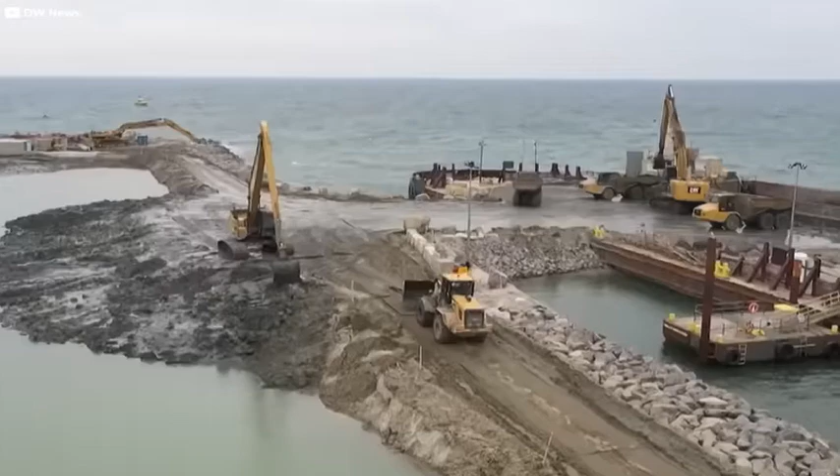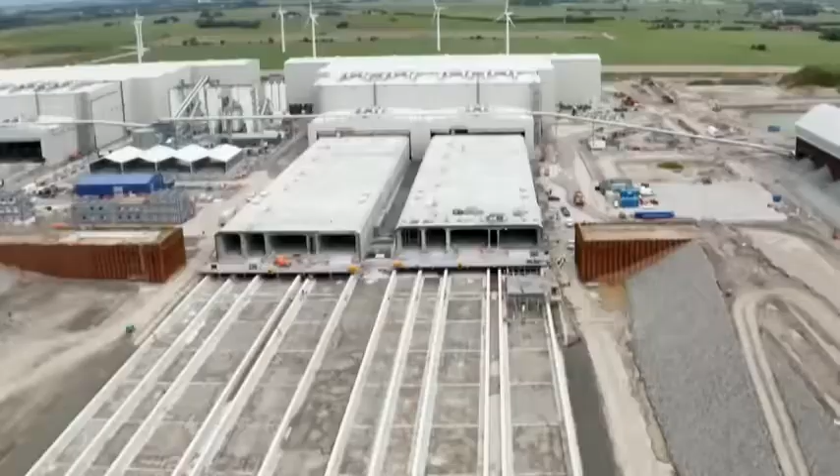The calm surface of the Baltic Sea conceals a quiet yet transformative effort by Germany and Denmark. These two nations are steadily reshaping Europe's future, one enormous scoop of sand at a time. In southern Denmark, a massive project is taking shape to connect the country with Germany. What appears to be a discreet dredging operation is, in fact, part of one of Europe's most ambitious infrastructure ventures, larger than it first appears. Backed by billions of euros, this plan could forever alter how countries link and interact. But why is Germany digging so extensively beneath the sea, and why is it attracting so little attention?

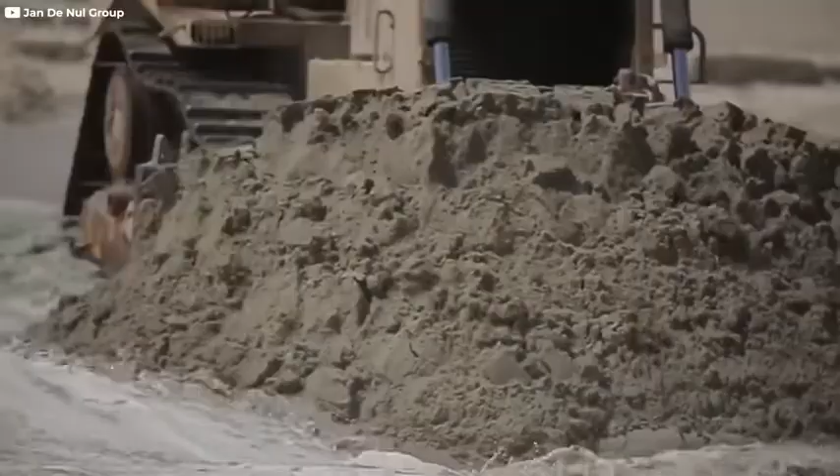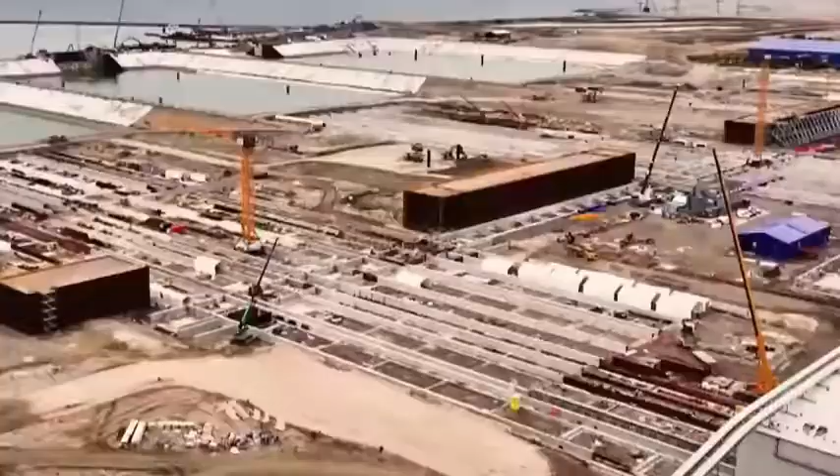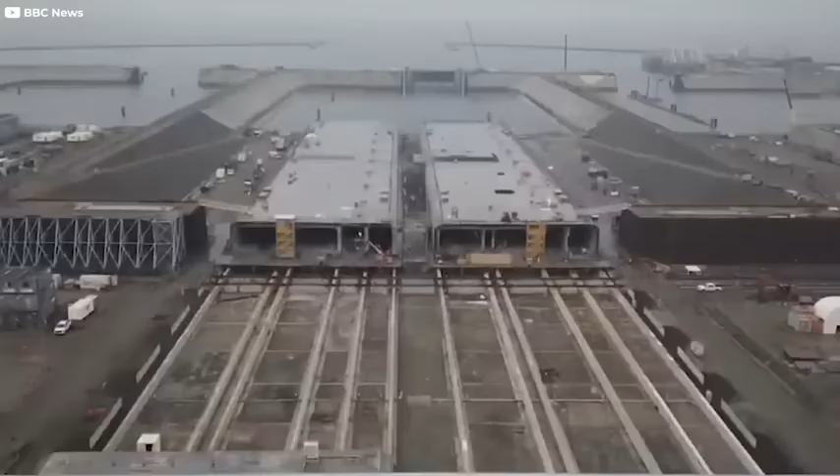Deep under the Baltic, a monumental dredging operation is quietly progressing. This project is so grand in scale that it's being compared to the Channel Tunnel. At the heart of it lies the Fehmarn Belt Fixed Link, a 17.6-kilometer submerged tunnel that will connect Rødbyhavn in Denmark to Puttgarden in Germany. When finished, it will become the longest combined road and rail immersed tunnel in the world. It's an engineering triumph that's quietly setting new benchmarks for infrastructure, even as global headlines focus elsewhere. More than just a connection between two countries, this tunnel is poised to reshape transportation and trade across Europe.

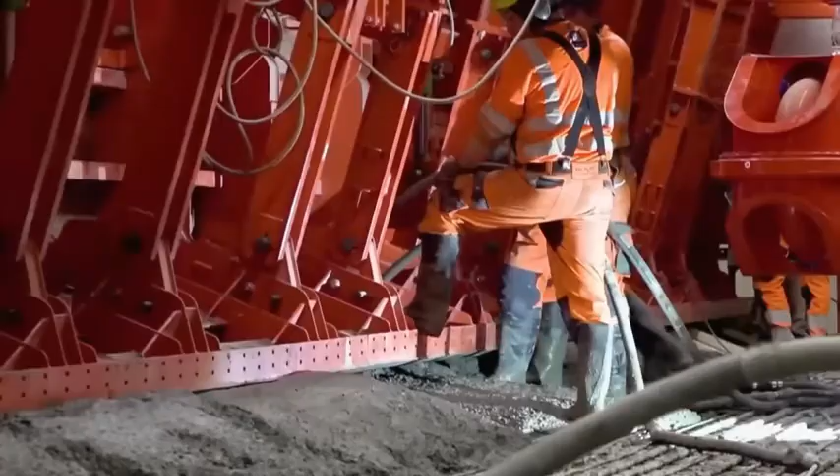Official construction began in 2020 following years of legal challenges, environmental assessments, and coordinated agreements between Denmark and Germany. With construction now well underway, the tunnel is expected to open by 2029. The €7 billion project, primarily funded by Denmark and supported by the EU, is impressive not just for its size but for the precision and efficiency of its implementation. Engineers have dubbed it a once-in-a-century feat, not only for its ambition but also for the new global standards it sets in sustainable underwater construction and cross-border collaboration.

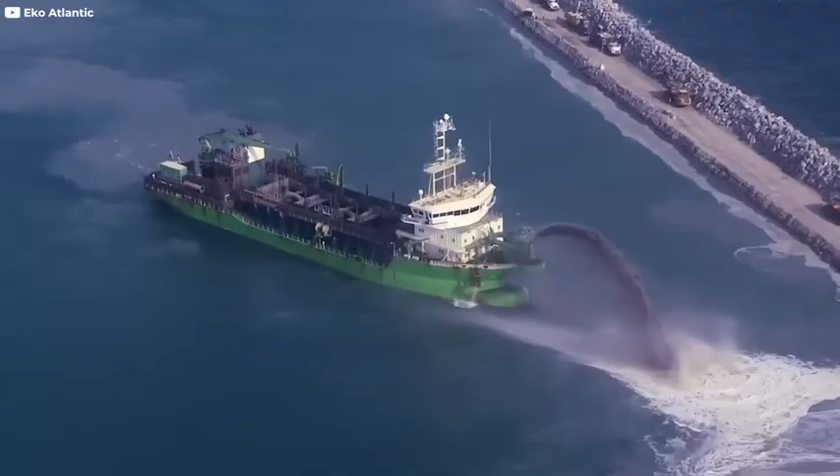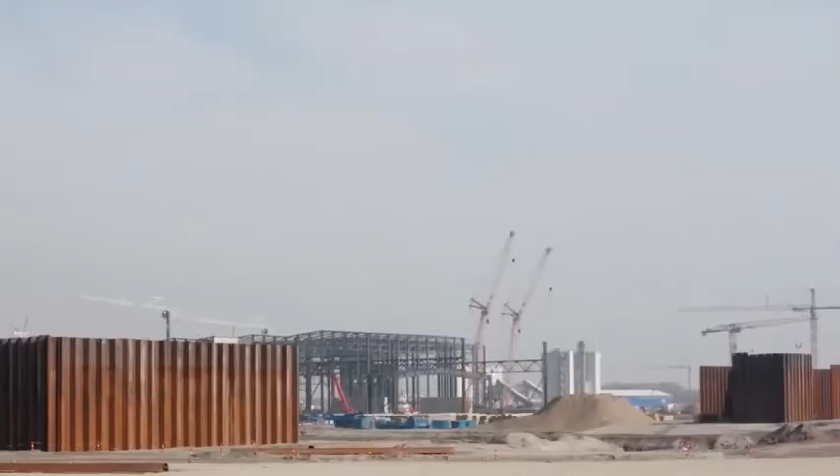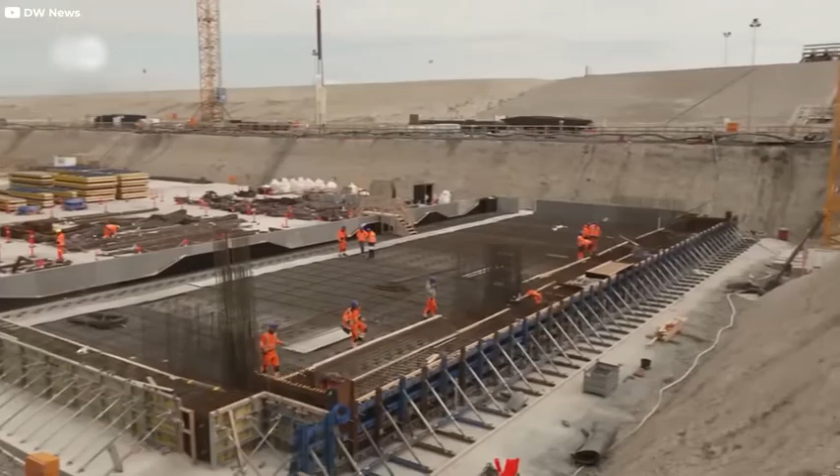Before this tunnel, the main way to travel or transport goods across the 18-kilometer gap between Rødbyhavn and Puttgarden was via ferry. This route, called the Vogelfluglinie or bird flight line, has operated since the 1960s and has long served as a crucial link between Scandinavia and Central Europe. Millions of travelers and freight trucks rely on its 45-minute crossing each year. However, the service has become outdated, with weather disruptions and seasonal delays reducing its reliability. For a region with growing economic needs, ferries are no longer enough. This is the motivation behind the Fehmarn Belt Fixed Link, to cut travel times, increase freight capacity, and deliver dependable, all-season connectivity between northern and central Europe.

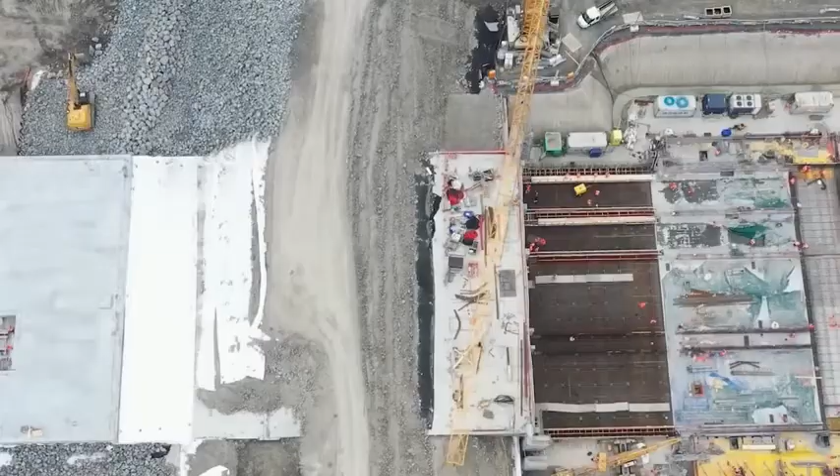To fully grasp its significance, it helps to view it in a broader context. The Fehmarn Corridor is a vital part of the Trans-European Transport Network, TEN-T, an EU initiative to improve regional connectivity. Located along the Scandinavian-Mediterranean Core Network Corridor, the tunnel plays a critical role in freight routes that span from Helsinki and Stockholm down to Palermo, Italy. Currently, a ferry bottleneck slows this key trade corridor. The urgency to improve freight logistics and reduce carbon emissions made a better alternative essential.

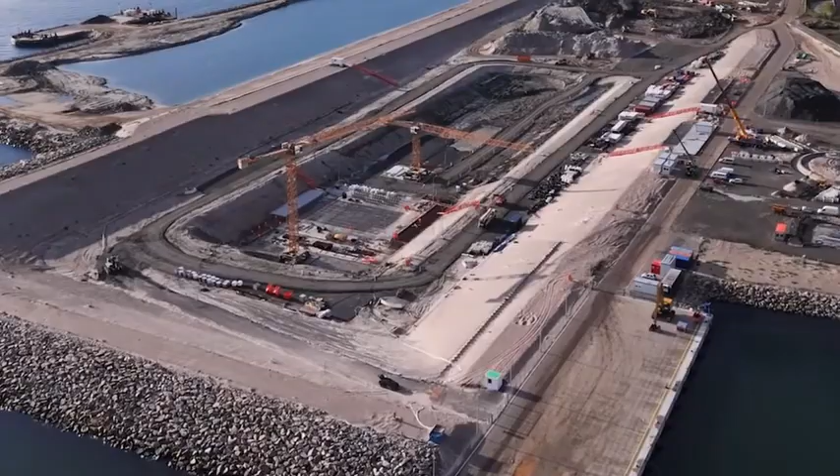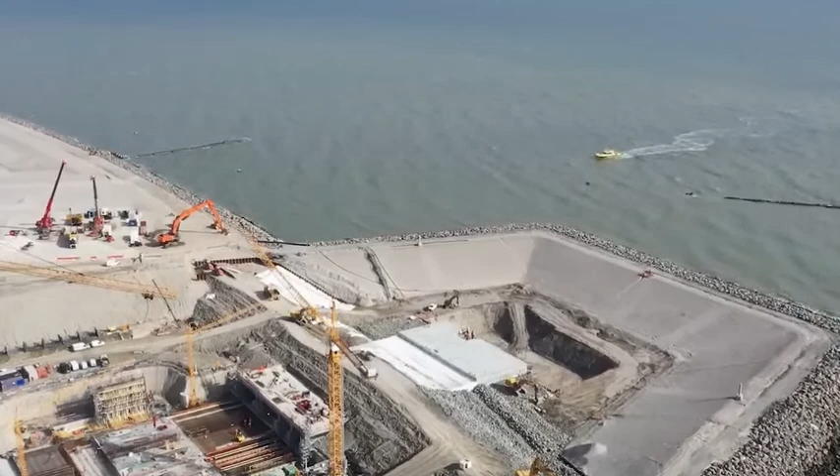Denmark and Germany are already linked by the Fehmarn Sound Bridge, built in 1963, connecting the island of Fehmarn to mainland Germany. While historically important, the bridge can no longer meet modern traffic demands. As part of the tunnel project, Germany plans to either upgrade or replace it, ensuring a continuous, modern connection to the tunnel's German terminus and beyond.

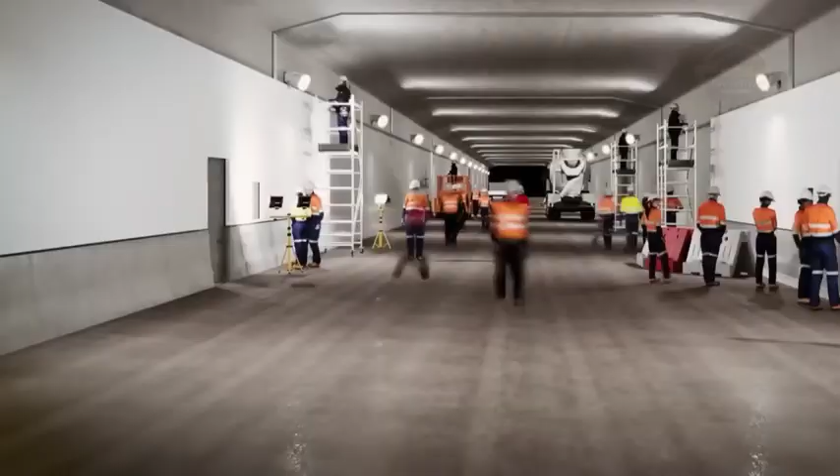So, why opt for a tunnel over a bridge? The Baltic Sea's shallow depth makes it highly susceptible to strong winds and waves, making a tunnel the safer and more stable choice. It also has fewer impacts on marine life and avoids disrupting shipping lanes, issues that would be worse with a bridge. The tunnel solves several problems at once. It eliminates ferry delays, boosts Europe's transportation grid, modernizes outdated infrastructure, and aligns with climate goals by promoting rail freight over road transport.

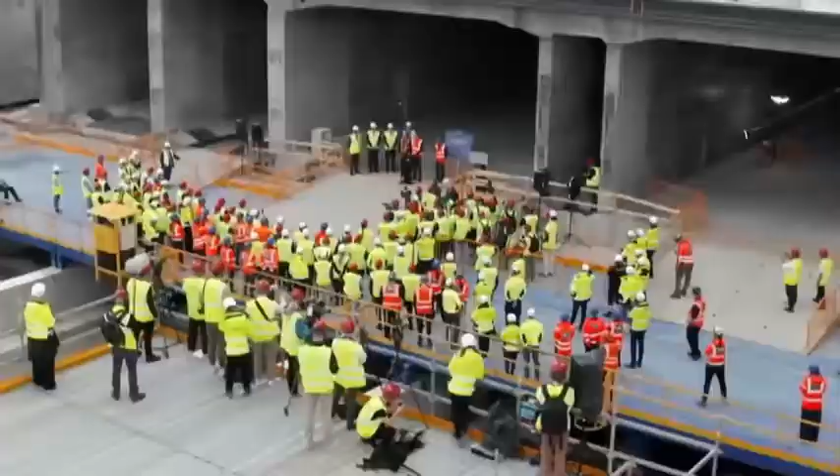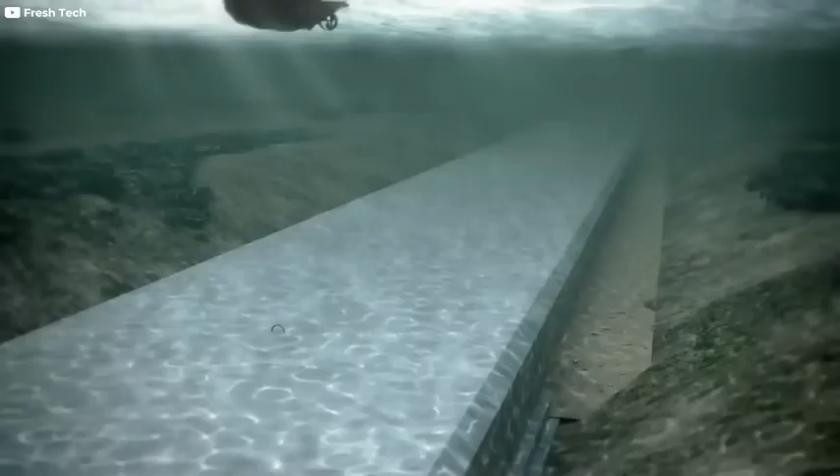To make this underwater tunnel a reality, a massive operation is taking place beneath the waves. Before the tunnel segments can be installed, millions of cubic meters of sand, silt, and clay must be removed from the seabed. This excavation, among the largest in European history, has amazed even seasoned marine engineers with its scale and precision. But why remove so much sand? What is being done with it, and how is this quiet dredging project powering such a bold vision?

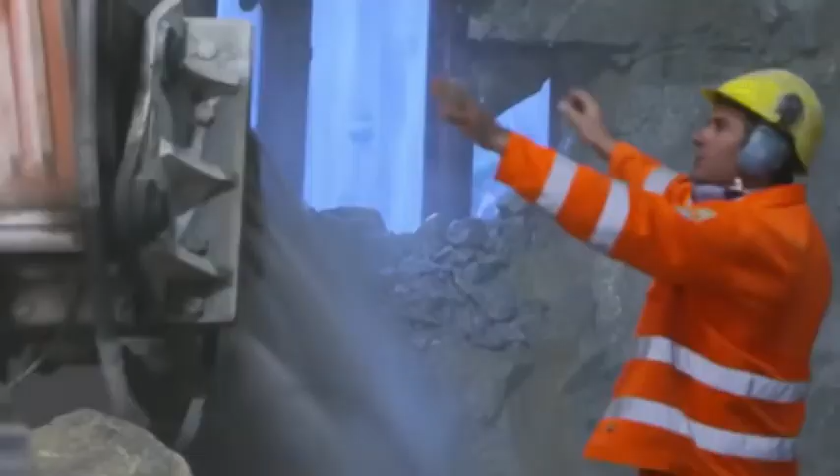Constructing a tunnel under the sea involves much more than laying down steel and concrete. It begins with moving vast amounts of earth. In southern Denmark, an enormous excavation is underway to carve a trench beneath the Baltic for the Fehmarn Belt Fixed Link.

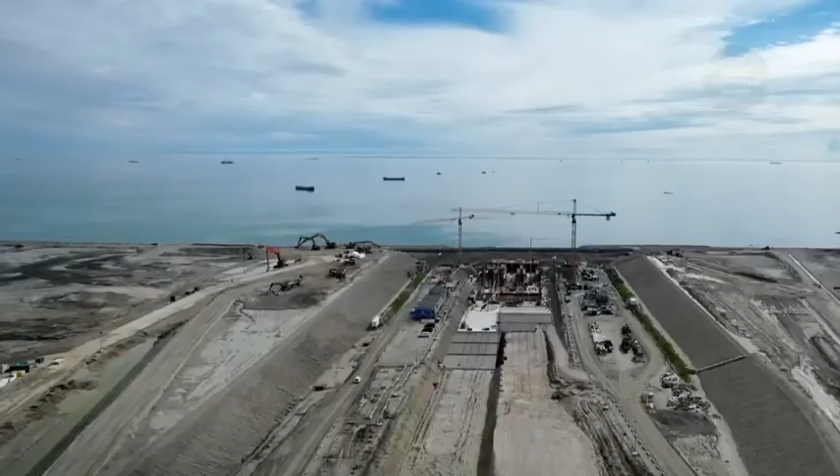Over 19 million cubic meters of sand, silt, clay, and glacial debris are being dredged from the seafloor. This trench will be 60 meters wide, up to 16 meters deep, and stretch 18 kilometers long. Each tunnel segment, roughly the size of a football field and as heavy as a battleship, will be precisely placed into this trench.

But the seabed is not uniform. It's a challenging mix of fine clay, sticky silt, and dense glacial deposits from the Ice Age. These tough conditions require a combination of advanced dredging techniques and highly specialized equipment.

One key piece of machinery is the trailing suction hopper dredger, TSHD, massive vessels that drag suction heads along the sea floor, vacuuming sediment and storing it in onboard hoppers. These ships work non-stop, guided by GPS and sonar to achieve centimeter-level precision.

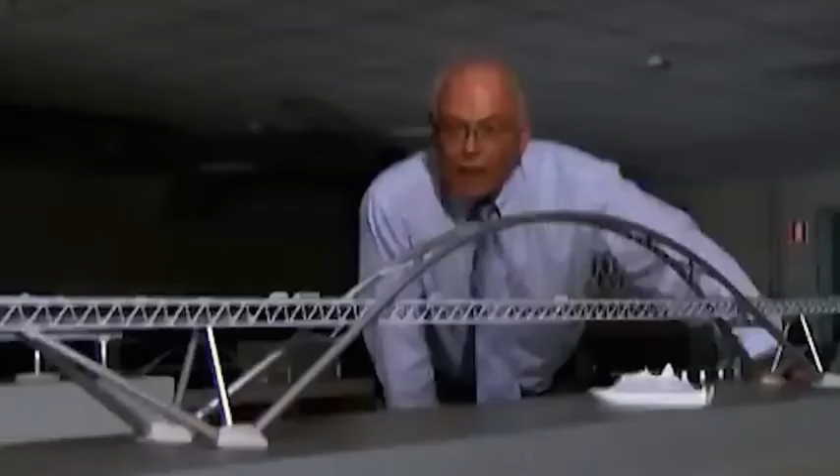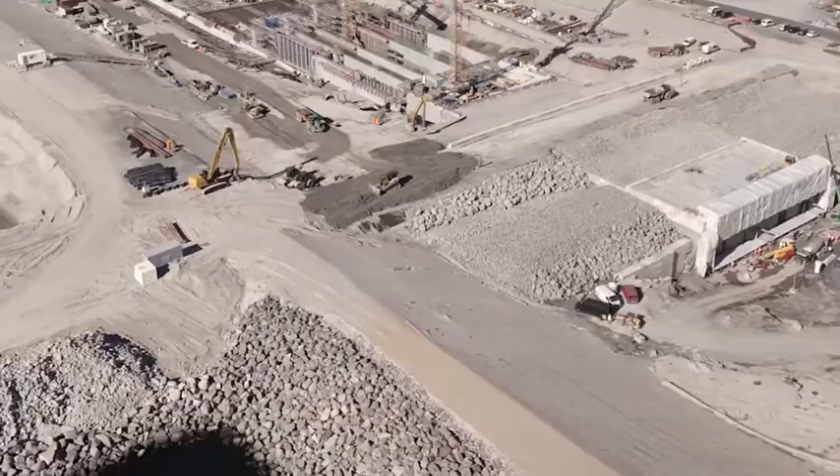For harder sections of seabed, powerful grab dredgers take over, capable of breaking through the denser materials. Massive floating cranes equipped with heavy-duty buckets are being used to break through tough layers of glacial till and dense clay beneath the seabed. In some situations, large backhoe dredgers come into play, functioning like enormous underwater excavators.

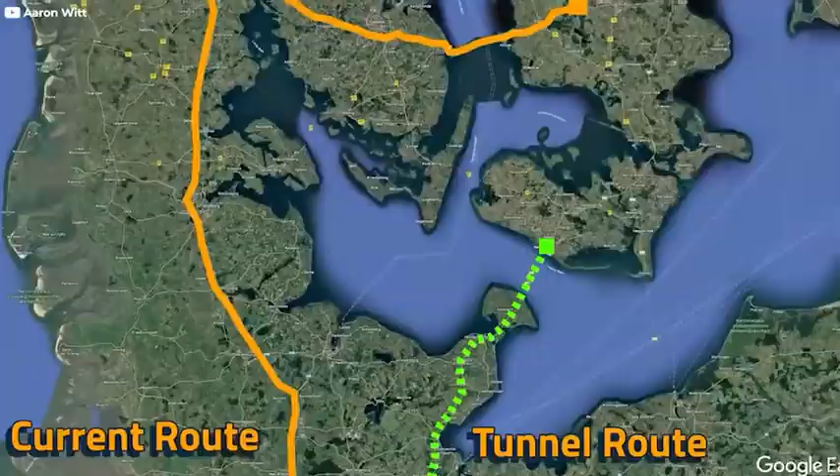To understand the magnitude of this excavation, consider that the Fehmarn Belt Tunnel project involves the removal of over 19 million cubic meters of sand and soil. That's nearly half the volume of the Panama Canal, which required years and a massive workforce to complete. It's enough material to build a small city, underscoring the immense scale of this underwater engineering effort as Germany and Denmark reshape the Baltic Sea floor.

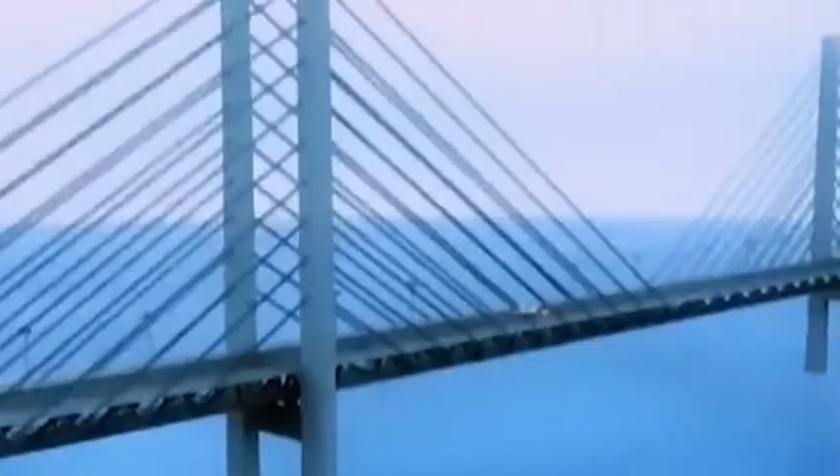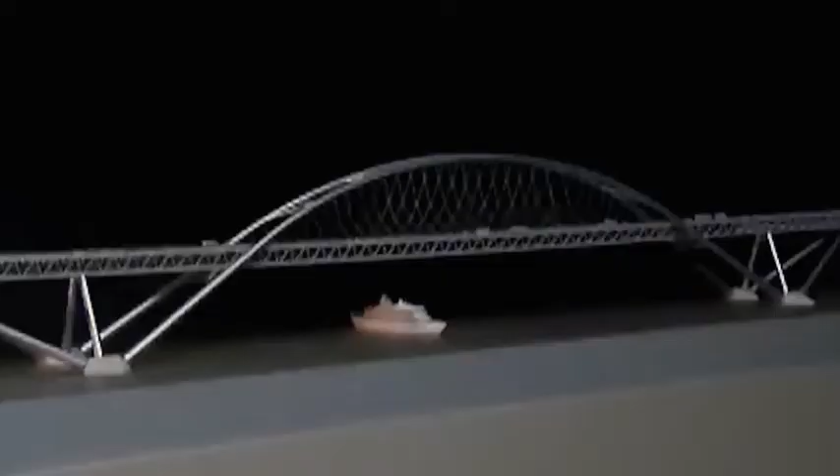Rather than discard all that excavated material, it's being put to good use. The displaced sand and soil are carefully repurposed to build new coastal landscapes, elevate land near tunnel entrances, and create protective dunes and wildlife zones on both the Danish and German shores. This approach to land reclamation is crafting entirely new areas along the coast, some of which are set to become parks and recreational spots once construction wraps up.

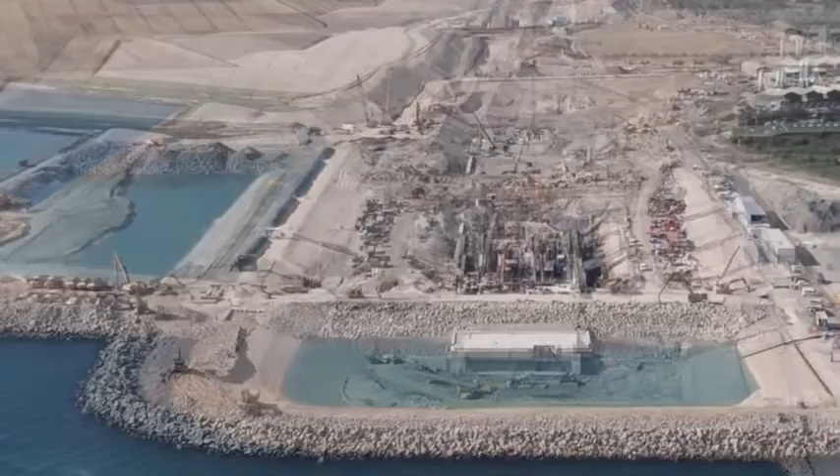It's a textbook example of circular construction, an efficient and environmentally thoughtful method that reintegrates excavation material back into the ecosystem instead of dumping it at sea. However, the process hasn't been without complications. The project initially ran into delays due to environmental concerns, particularly around the marine ecosystems in the Fehmarn Belt.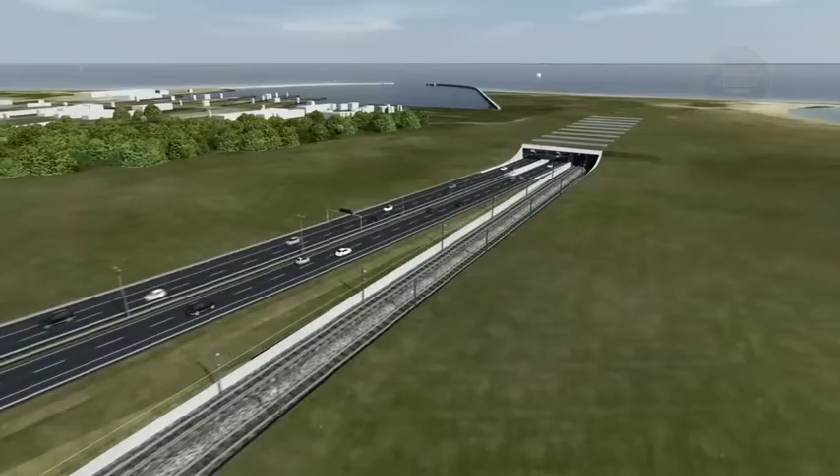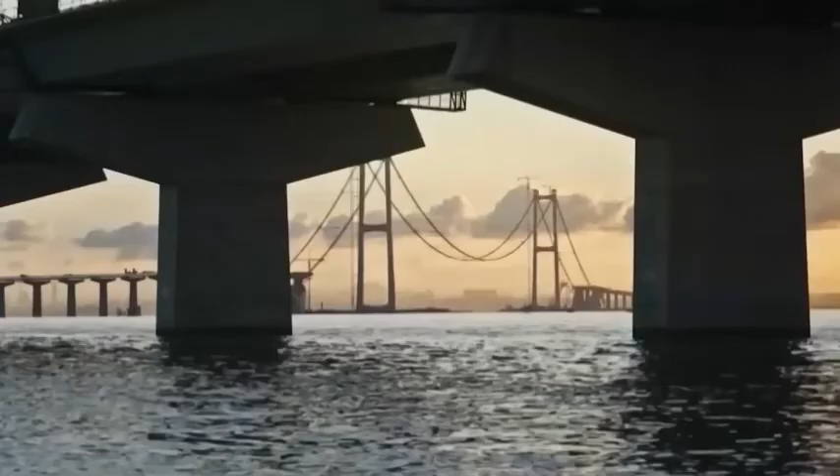In response, dredging was scheduled to avoid disrupting key breeding periods for marine life. Underwater sensors and satellites have also been used to closely track sediment clouds. This careful planning reflects a balancing act between advanced engineering and environmental stewardship, one that has been executed with notable care and accuracy. Beneath all this groundwork lies more than just a trench, it's the base for a groundbreaking tunnel that is setting new standards in both size and innovation.

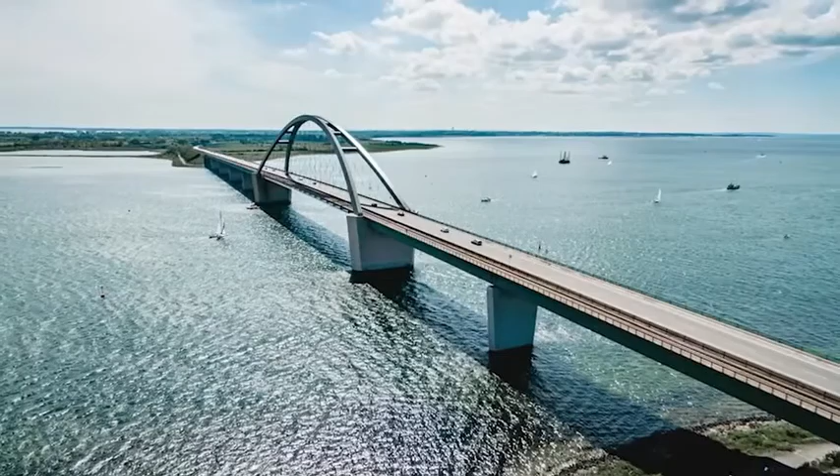At the heart of this transformation is the use of an immersed tube tunnel system. This revolutionary technique is redefining underwater tunnel construction. When most people think of tunnels, they picture giant machines boring through rock beneath mountains or cities. But under shallow seas like the Baltic, there's a more effective method. The Fehmarn Belt fixed link is pioneering the use of immersed tube tunnels on an unprecedented scale.

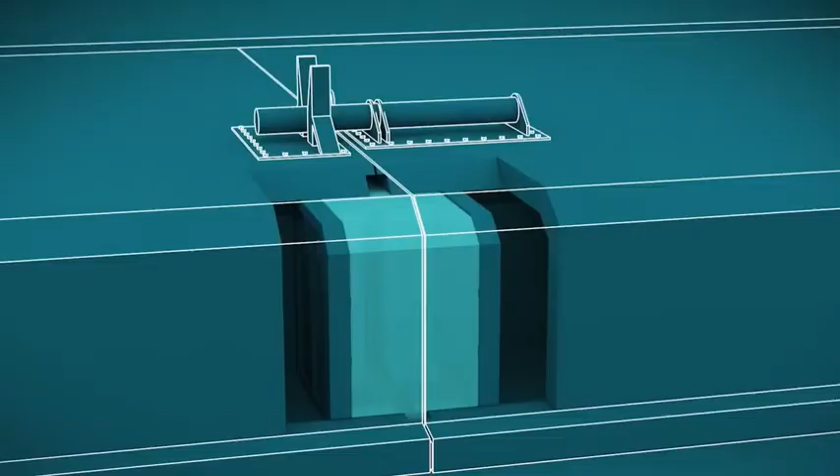Unlike traditional tunnels, these are constructed on land in dry docks, then segmented and floated out to sea like colossal vessels. Once at the site, each segment is submerged into a prepared trench on the seabed using a precise system involving cranes, ballast tanks, and high-tech navigation.

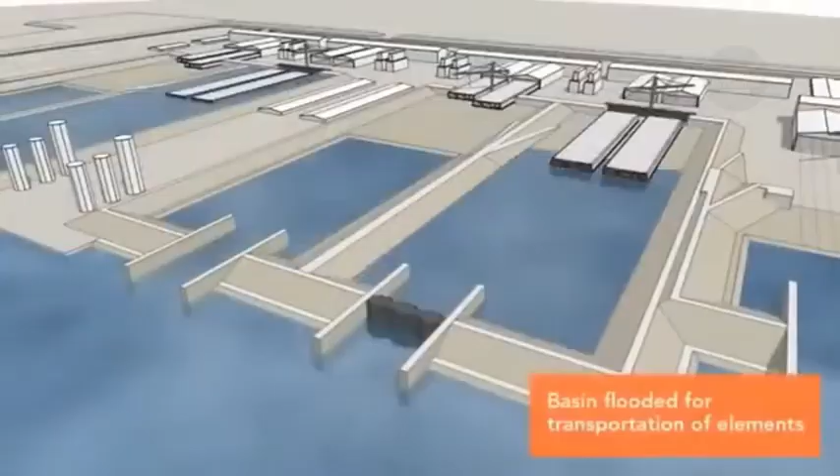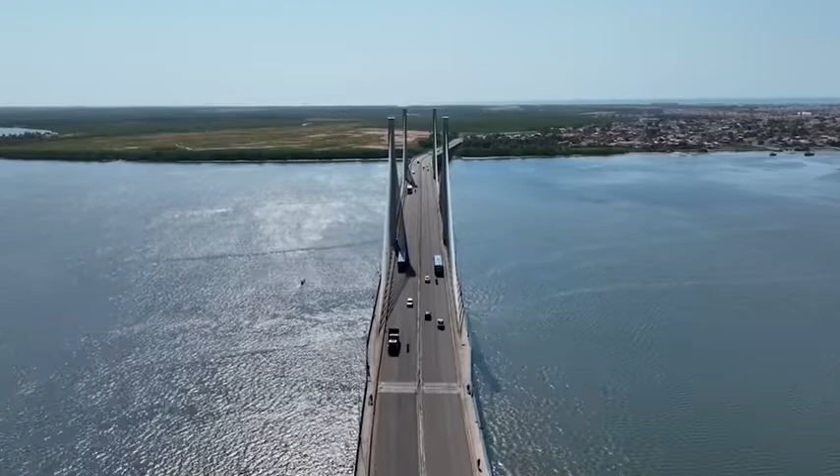Despite earlier obstacles, the Fehmarn Belt Tunnel is moving steadily forward. The scale of the project is striking, from the specially built harbour to the massive tunnel segment factory that stretches over a kilometre. The scope also includes the removal of 19 million cubic meters of seabed and investments totaling billions of euros. This is not your typical infrastructure job, it's a rare mega-project unfolding beneath the surface of the Baltic Sea.

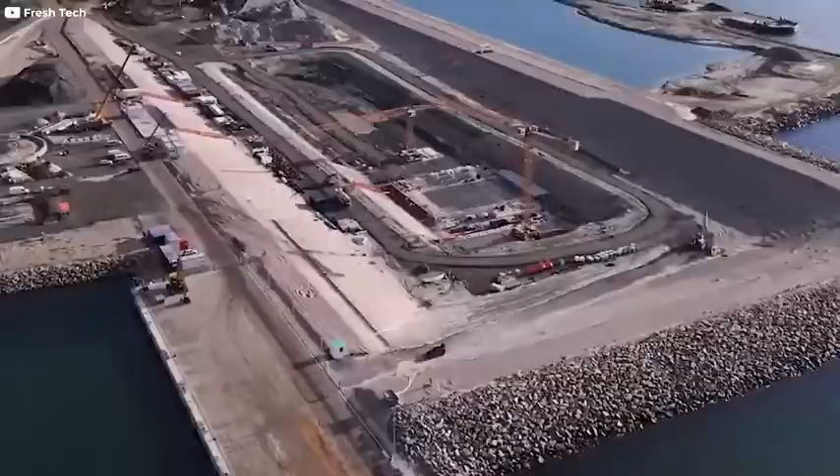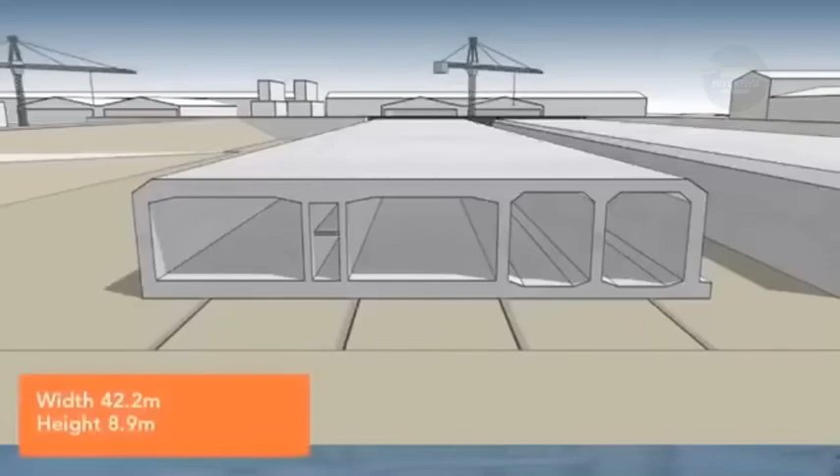The tunnel will replace the current ferry service between Rødbyhavn in Denmark and Puttgarden in Germany, which takes about 45 minutes.

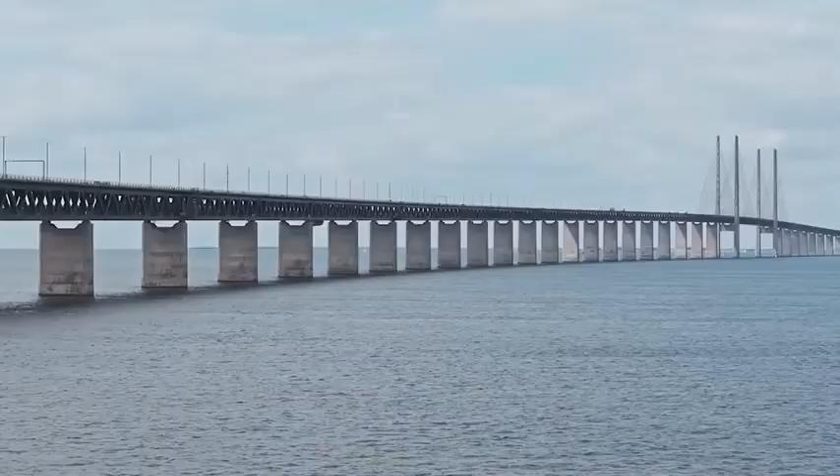Once the tunnel is completed, the same journey will take only 7 minutes by train and 10 minutes by car. This drastic reduction in travel time is expected to revolutionize transportation, lower emissions, and enhance regional mobility.

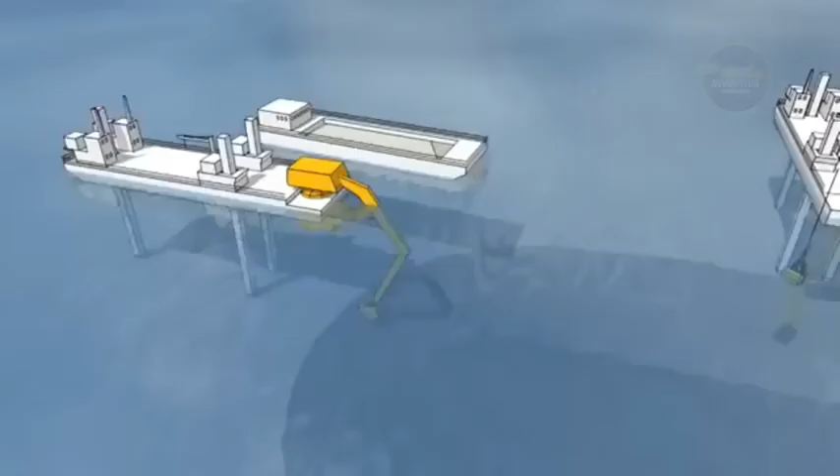A massive construction facility at Rødbyhavn supports the effort, where 89 tunnel elements, each 217 meters long, are being cast using high-performance concrete and reinforced with tons of steel. These will be floated out, submerged, and aligned with millimeter-level accuracy.

Every aspect of this project is oversized. The seabed trench being dug is 60 meters wide and up to 16 meters deep, requiring the handling of over 3 million tons of tunnel components. This is among the largest marine excavation efforts in Europe's history.

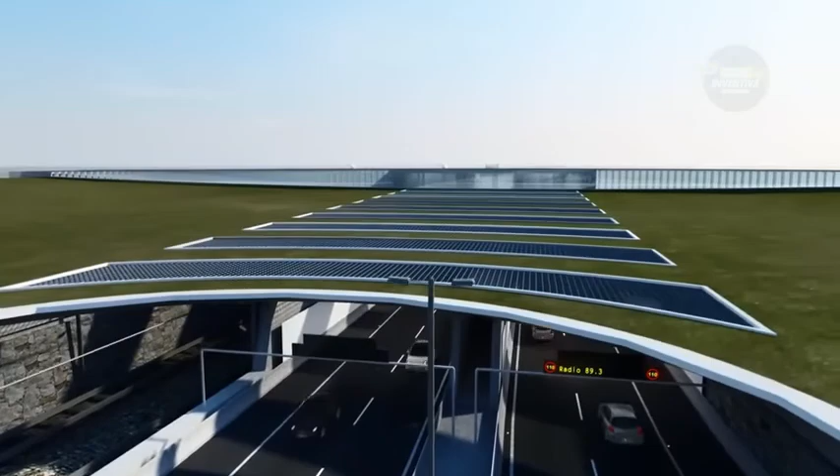The workforce involved is just as extensive, including thousands of professionals, marine engineers, divers, scientists, logistics experts, and skilled tradespeople. Thousands more jobs have been generated indirectly across industries in Denmark and Germany.

With an estimated cost of €7 billion, it ranks among Europe's priciest infrastructure projects. But stakeholders view it as a worthwhile investment, promising long-term benefits like quicker travel, improved freight systems, and a direct trade corridor from Scandinavia to Italy.

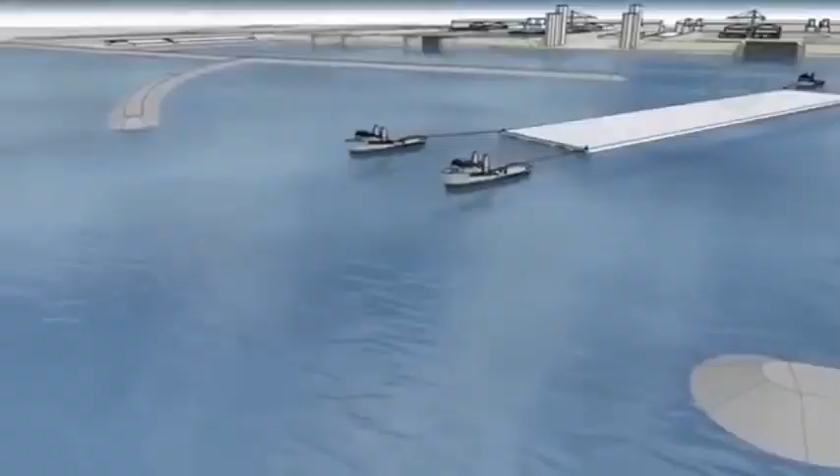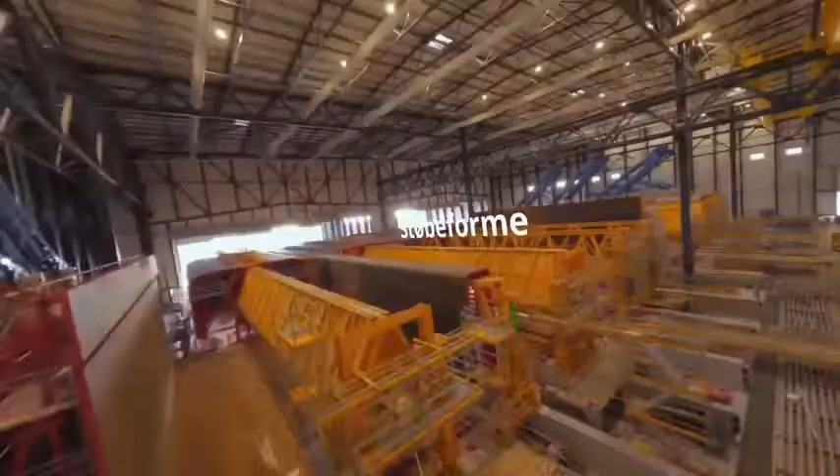The Fehmarn Belt Fixed Link is more than just a Danish-German initiative, it's influencing global thinking on infrastructure, trade, and environmental sustainability. Once operational, the tunnel will offer a high-speed connection between northern and central Europe, unlocking new trade routes and shrinking travel times across the continent. With weather delays and long boarding times eliminated, freight and passengers will move faster and more reliably.

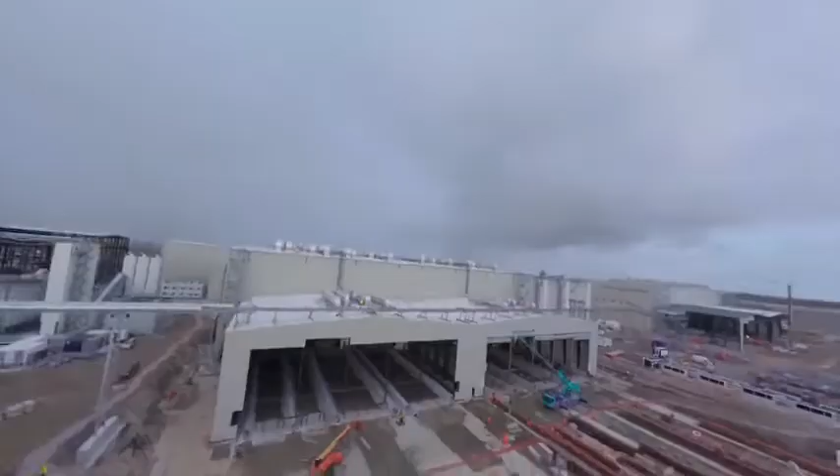This improved connectivity will provide a major lift to the logistics sector. Trains will replace ferries for freight, cutting transport costs and strengthening the supply chain. By integrating into the wider Trans-European Transport Network, TEN-T, the tunnel will enhance seamless cross-border travel and freight movement throughout the EU.

The tourism sector will also see gains. Easier access between Denmark and Germany will attract more visitors and make cross-border trips more popular. Towns like Puttgarden and Rødbyhavn are gearing up to shift from ferry ports to tourist destinations, with plans for new restaurants, hotels, and cultural sites.

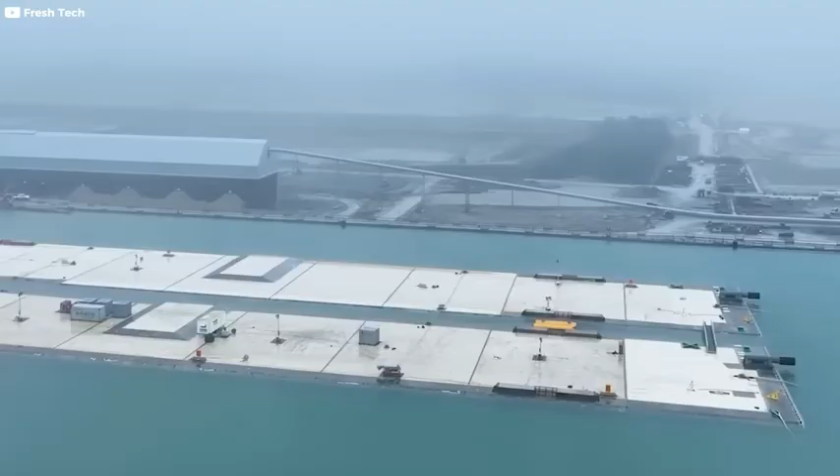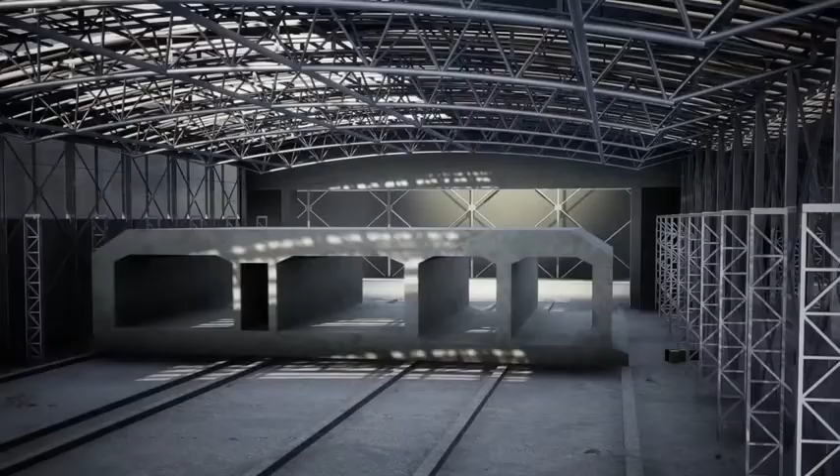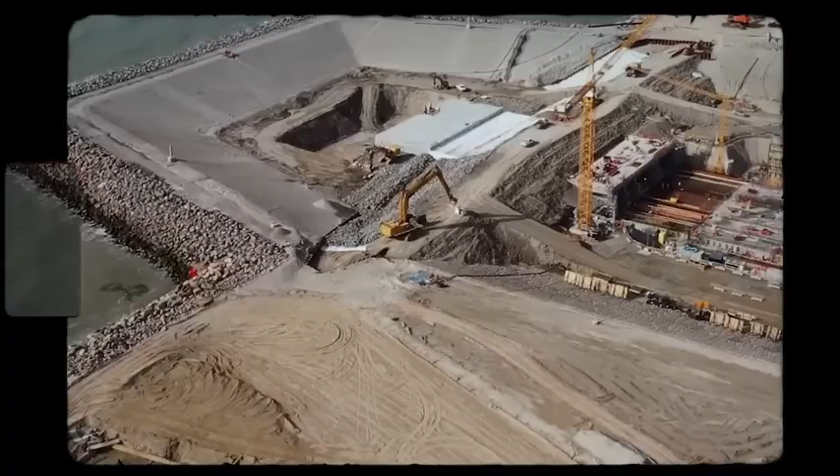The environmental payoff is equally significant. Replacing thousands of trucks and ferry trips with electric trains will reduce carbon emissions considerably. Currently, ferries on this route emit around 2 million tons of CO2 annually. The transition to rail promises a cleaner, quieter alternative that aligns with EU climate strategies and Denmark's commitment to green transport.

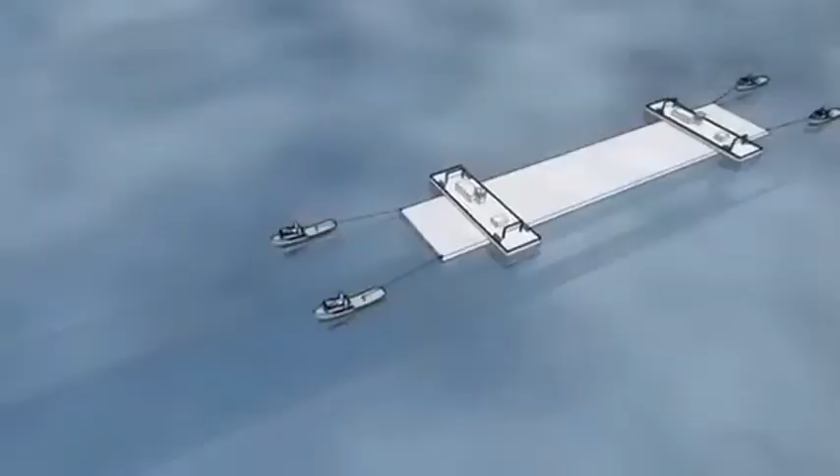These benefits don't come without significant costs. The upfront investment is massive, €7 billion for the tunnel alone, not including the cost of Germany's onshore infrastructure upgrades. Critics argue that it may take decades before the project recoups its expenses through tolls and trade advantages.

Environmental concerns also persist. Activists warn that construction and dredging could disrupt marine life in the Baltic Sea, especially the rare harbor porpoise, and stir up harmful pollutants buried in the seabed.

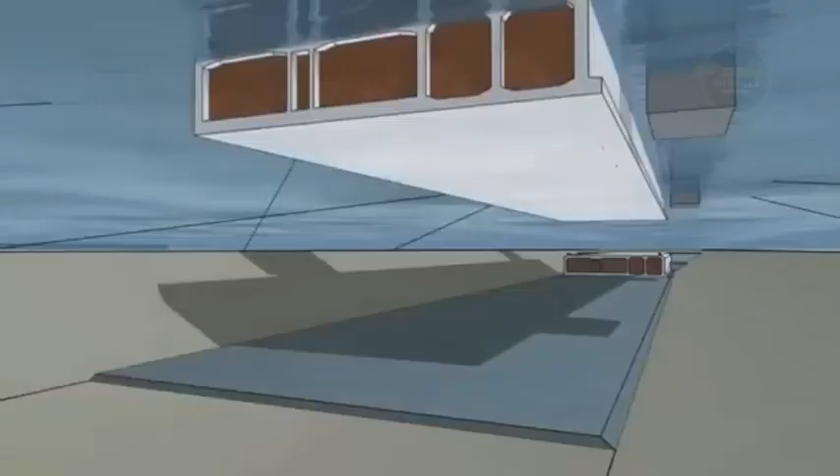This leads to a broader question: is this just the beginning? As nations push for faster, greener, and better connected transport systems, the Fehmarn Belt project might serve as a model for what's achievable. The implications for global transportation are profound. The Fehmarn Belt Fixed Link sends a strong message about the future, one shaped by climate challenges, population growth, and increasing competition in global trade.

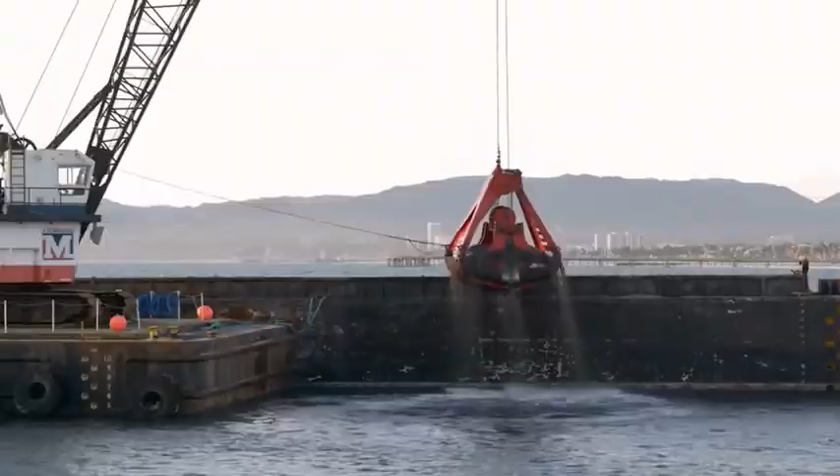Despite setbacks, construction of the tunnel is well underway, and its sheer scale is hard to ignore. From a specially designed construction harbor to a kilometer-long tunnel segment factory, and from 19 million cubic meters of dredged seabed to billions in investment, this is no ordinary infrastructure job. It's a rare mega-project for Europe, one happening quietly beneath the Baltic Sea.

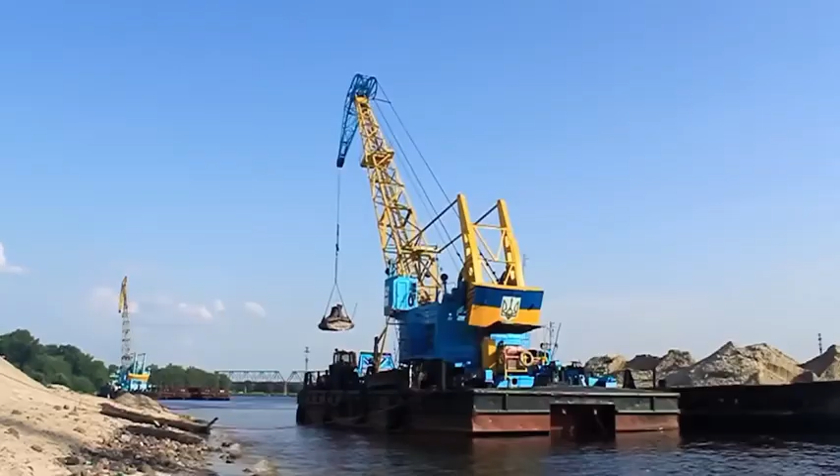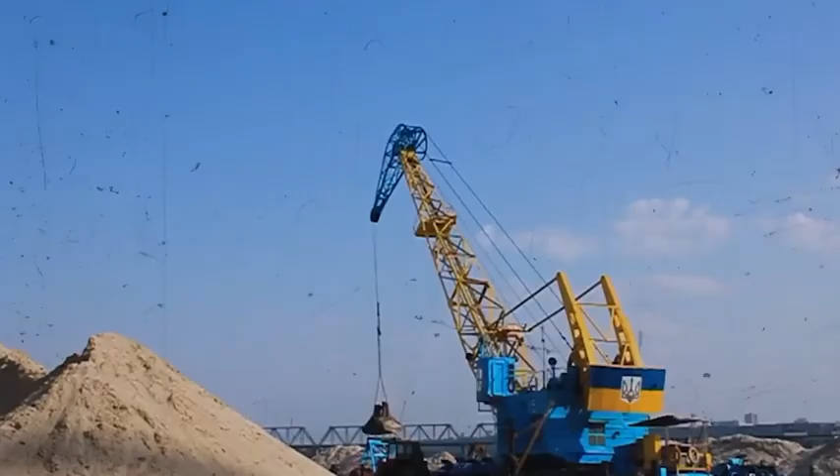The tunnel replaces the current ferry service between Rødbyhavn in Denmark and Puttgarden in Germany, which takes about 45 minutes. When the tunnel opens, that journey will shrink to just 7 minutes by train or 10 minutes by car. This major reduction in travel time is expected to revolutionize logistics, cut emissions, and vastly improve regional mobility.

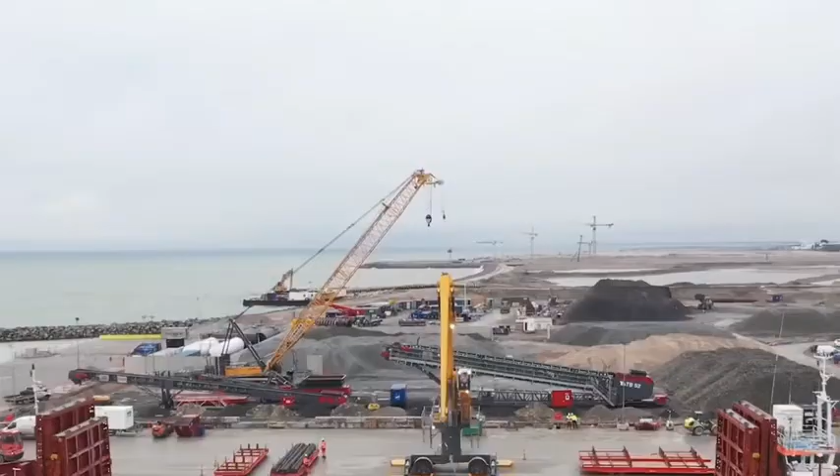To build the tunnel, a massive construction site was developed in Rødbyhavn. It includes one of Europe's largest facilities, a factory more than 1 kilometer long.

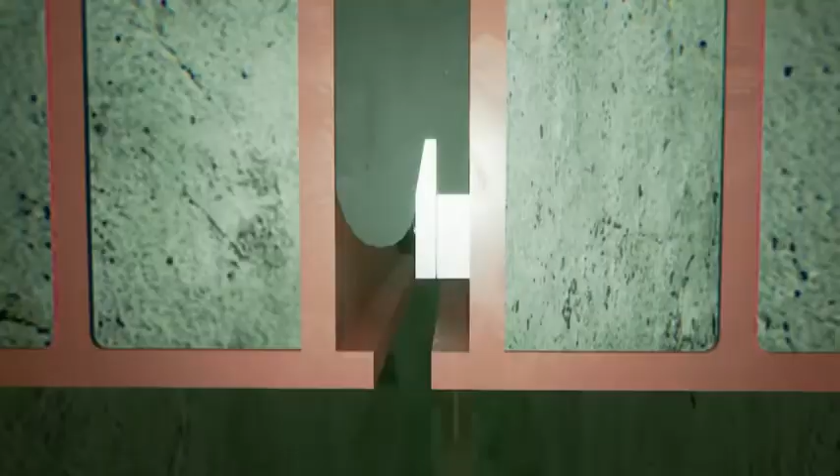Here, 89 enormous tunnel sections, each 217 meters long, are being cast in high-performance concrete and reinforced with thousands of tons of steel. Once ready, they'll be floated out to sea, sunk, and joined with extreme precision. The engineering is as massive as the structure itself.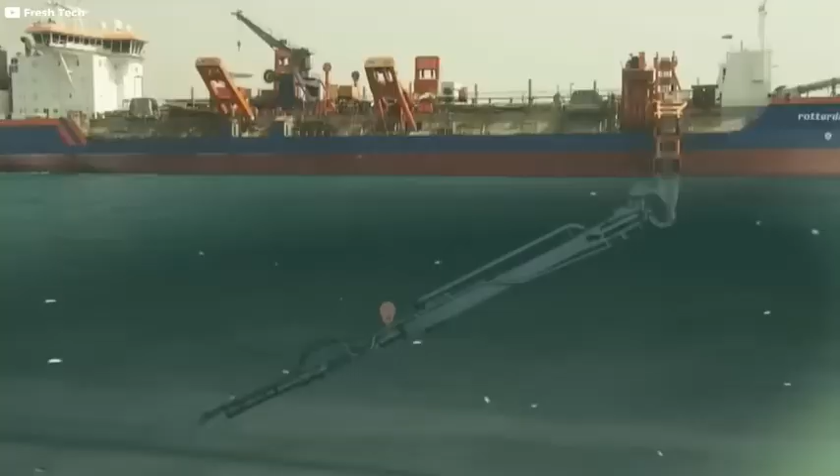The underwater trench is 60 meters wide and up to 16 meters deep, making room for over 3 million tons of tunnel components. The dredging operation, which has removed over 19 million cubic meters of seabed, is one of Europe's largest ever marine excavation efforts.

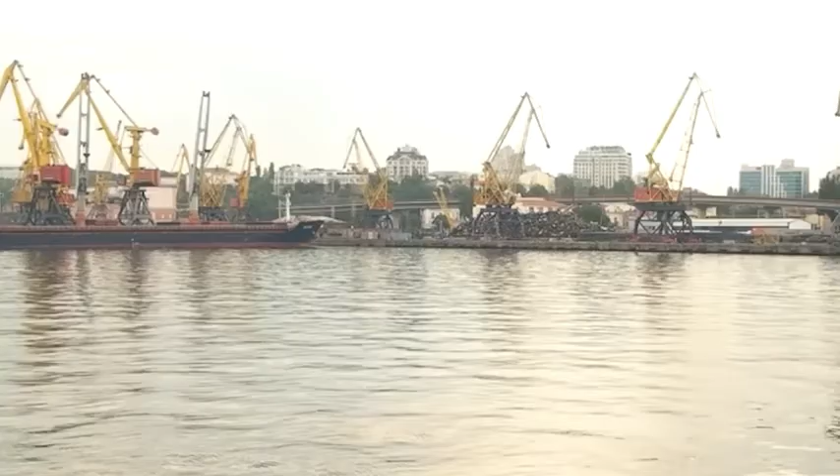The workforce behind the project is equally vast. Thousands of people are employed, from marine engineers and divers to environmental scientists and skilled trades. Thousands more are indirectly involved through related industries in Denmark and Germany, including manufacturing, logistics, and hospitality.

With a total cost of around 7 billion euros, this stands as one of Europe's priciest infrastructure efforts. However, supporters believe the investment is worth it. The tunnel will cut travel time, improve freight movement, and connect Scandinavia to southern Europe more efficiently than ever. It's more than a tunnel, it's a major economic artery that promises long-term benefits.

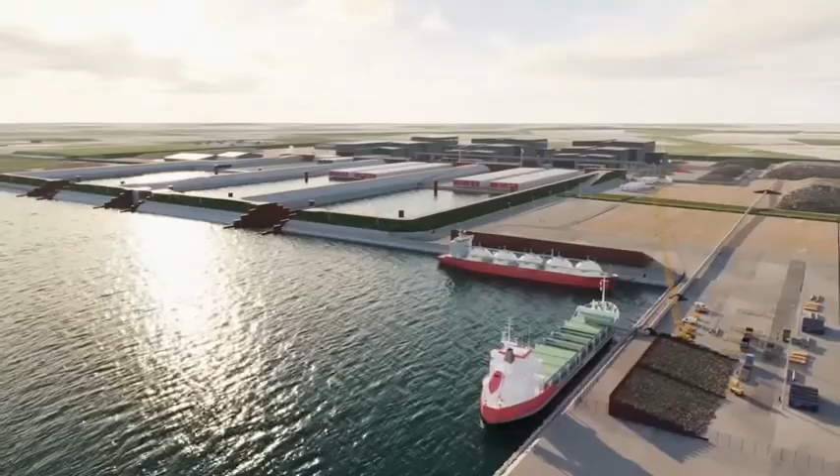The Fehmarn Belt fixed link isn't only transforming Germany and Denmark, it's reshaping global perspectives on transportation, trade, and environmental policy. The tunnel provides a direct, high-speed link between northern and central Europe, replacing ferry crossings that are slow, weather-dependent, and often delayed. Trains will make the trip in 7 minutes, cars in 10, improving efficiency across borders.

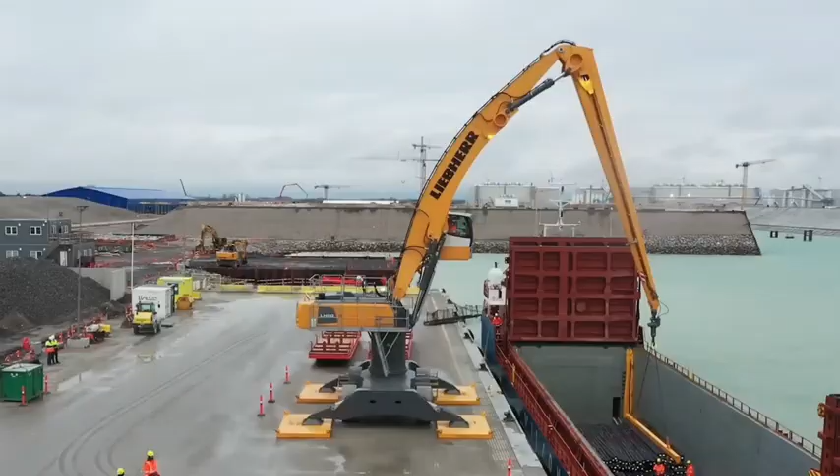This leap in mobility is particularly beneficial for freight operations. Goods that once crossed the Baltic by ferry can now move more rapidly and reliably by rail. This reduces shipping costs and strengthens supply chains. By integrating into the EU's Trans-European Transport Network, TEN-T, the tunnel enhances continent-wide connectivity and flow.

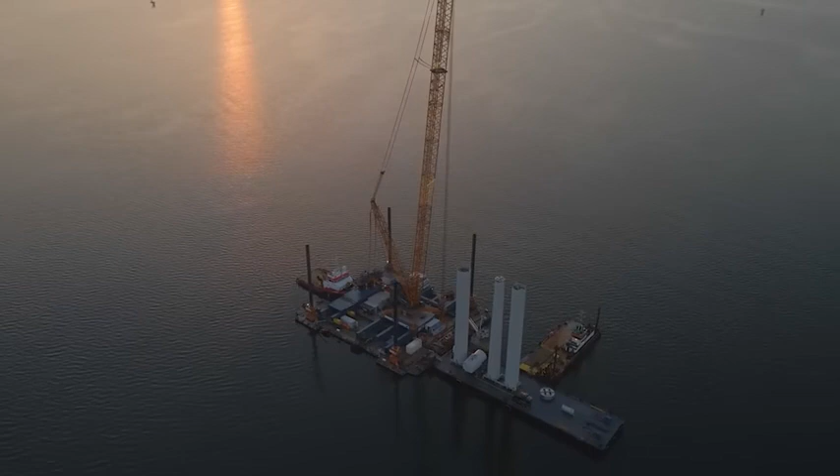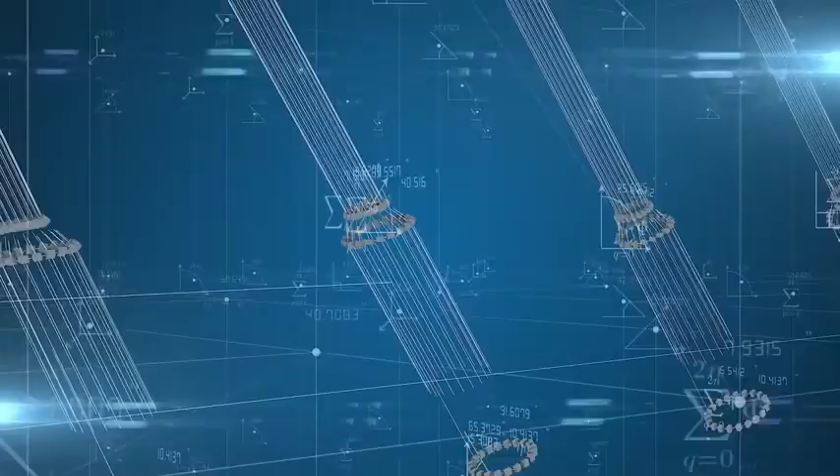Tourism is also expected to benefit. With faster travel, more people are likely to visit both northern Germany and southern Denmark on a single trip. The new ease of movement could encourage weekend getaways, cycling tours, and cultural exchange. Coastal towns like Rødbyhavn and Puttgarden are preparing for a tourism boom, developing new hotels, restaurants, and attractions.

Another major benefit is environmental. Replacing ferries and trucks with electric trains could cut emissions significantly. It's estimated that ferries on this route currently emit around 2 million tons of CO2 each year. Moving this traffic to rail helps meet EU climate goals and supports Denmark's shift toward greener transport.

Still, the enormous cost remains a point of contention. 7 billion euros is just for the tunnel; Germany's onshore upgrades are extra. Critics worry it could be decades before the project breaks even. Environmentalists also remain cautious, warning of the lasting ecological risks posed by seabed dredging and marine disruption.

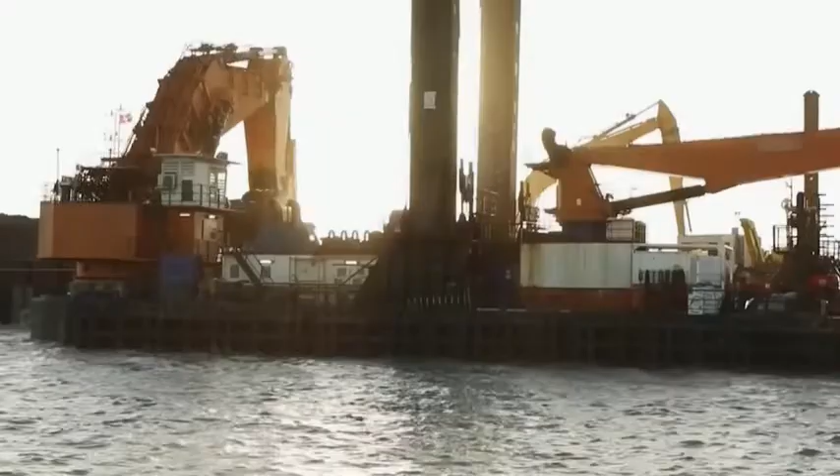Yet, this project may signal a turning point. The Fehmarn Belt shows what's possible when countries aim for greener, faster, and more connected infrastructure. It's a bold model for future transport systems. The tunnel represents a forward-looking vision. As global challenges like climate change, urban crowding, and economic pressure mount, this kind of infrastructure becomes more important.

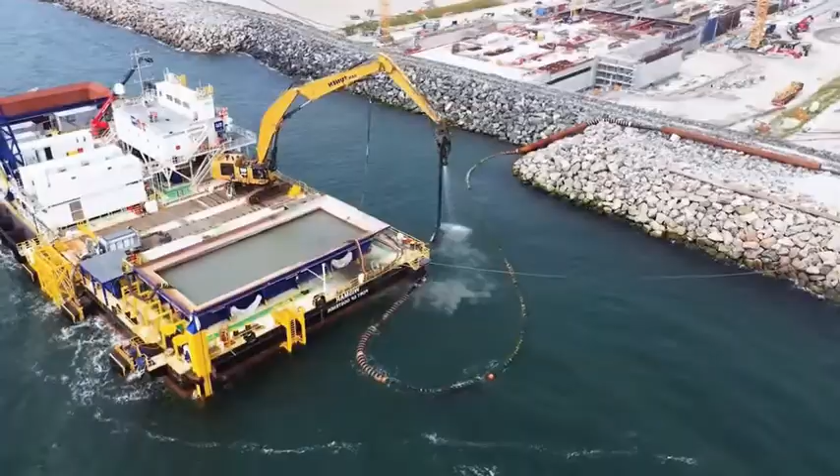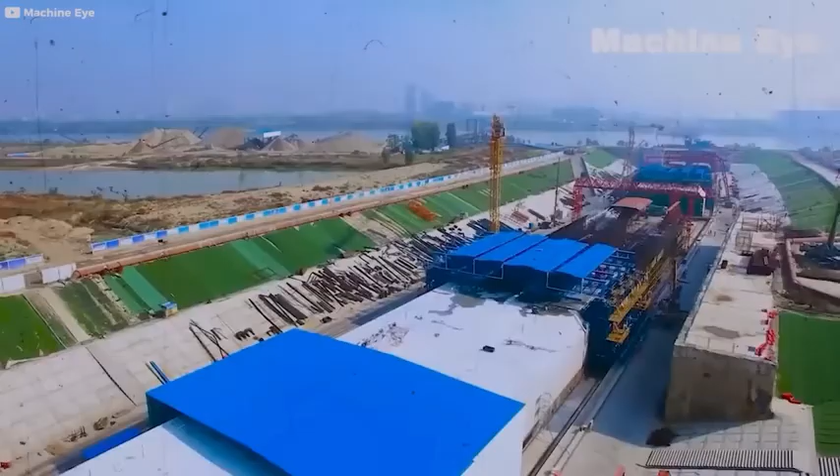Nations from Asia to Northern Europe are paying close attention, particularly those separated by seas or island chains. Fehmarn proves that even the most difficult engineering obstacles can be tackled with planning, technology, and a long-term outlook. While skyscrapers and bridges often grab the headlines, immersed tunnels like this may quietly lead the next generation of transportation innovations.

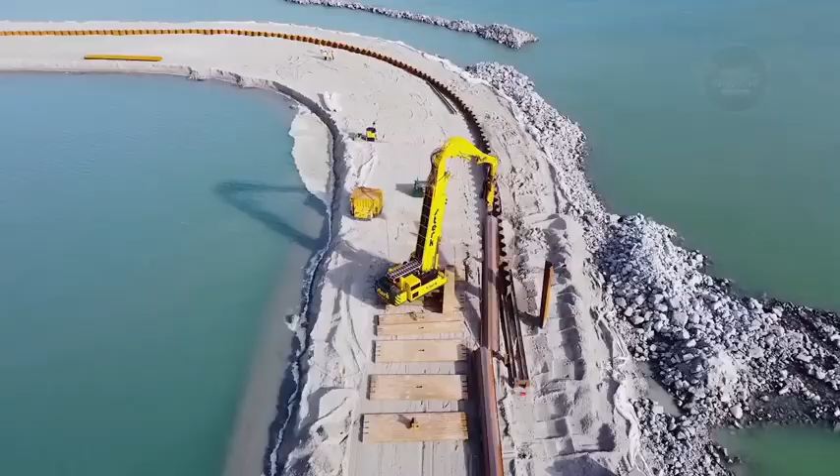Germany's role, less public but no less vital, demonstrates how leadership in engineering and diplomacy can make even the most complex projects succeed. The partnership with Denmark is a testament to what's possible through international collaboration, reducing dependence on outdated transportation methods.

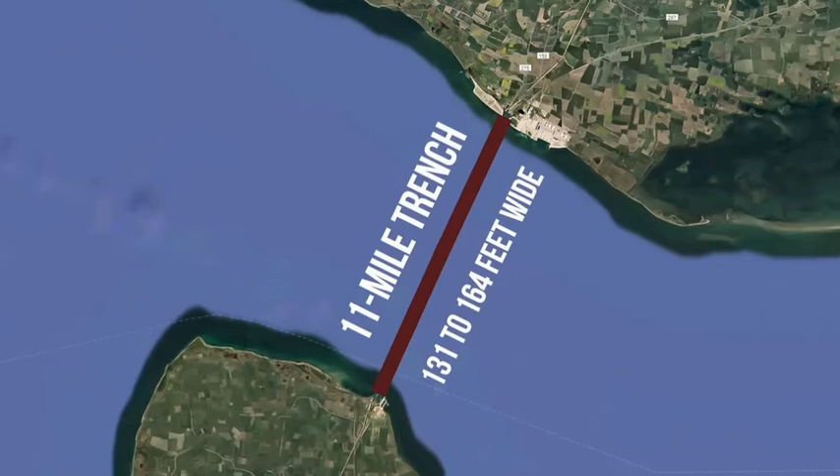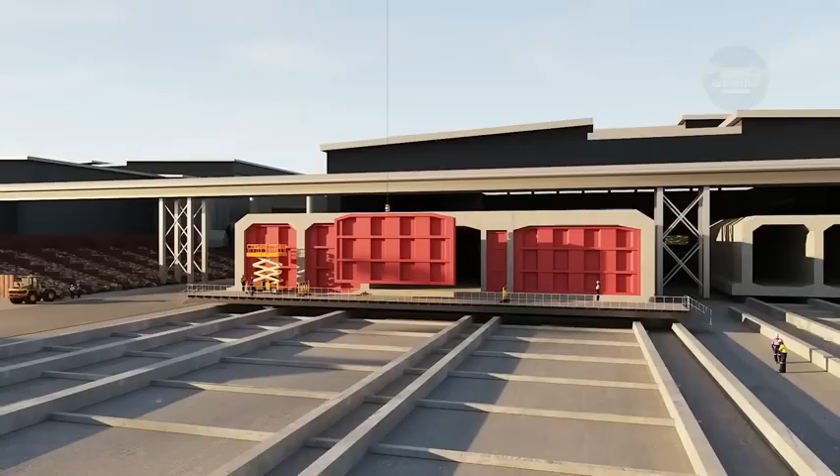Looking ahead, the Fehmarn Belt could inspire other large-scale tunnel projects. Concepts once seen as unrealistic, such as a fixed link between Italy and the Balkans, underwater routes in Japan, or even a Bering Strait tunnel, may gain new momentum. What Fehmarn ultimately proves is that with political will, public support, and respect for the environment, projects once thought impossible can become reality. A new mindset is emerging, one that values sustainability and strategic planning as much as speed.

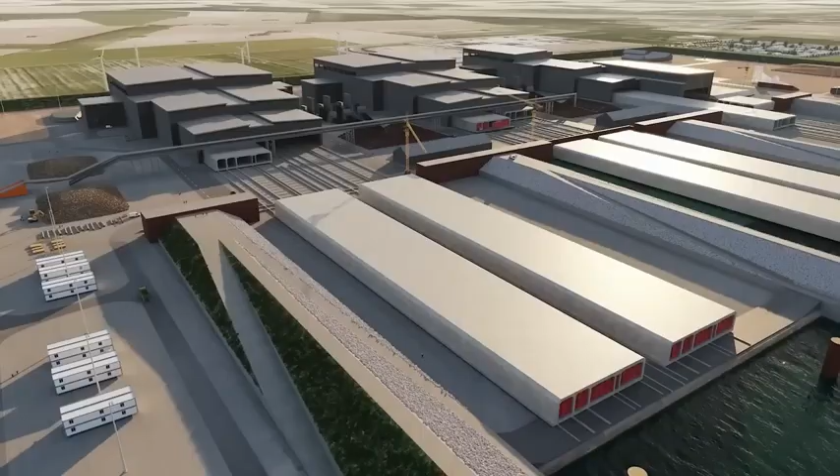Fixed links like this one offer reduced carbon footprints, dependable year-round service, and integration with electric transport solutions. As nations chase net zero targets, such infrastructure will become more common, not exceptions, but expectations. In the end, the quiet excavation beneath the Baltic Sea wasn't just about building a tunnel. It was about transforming the way we move, the way we trade, and the way we build a world where distance no longer divides us.